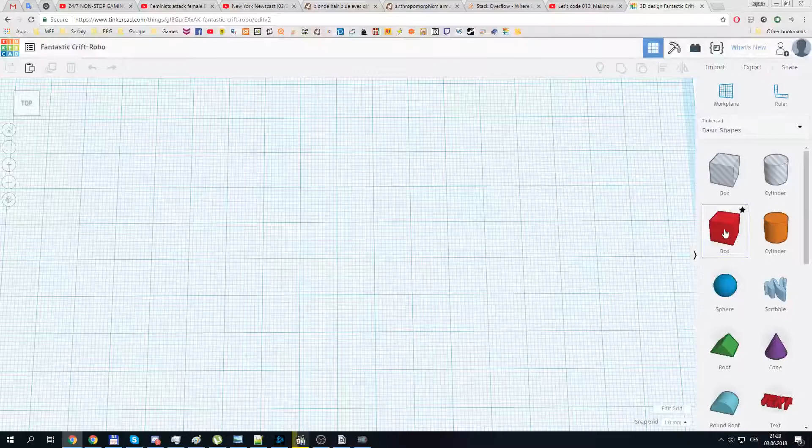Okay, what I want to do now is to create an object that will easily let me test what rotations can I expect to work with. You will see in a while. I probably should have created this ahead of time, but I was lazy.

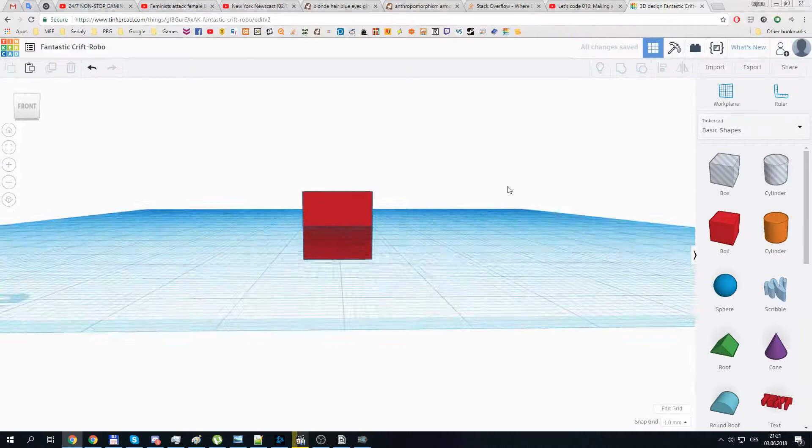So you have to sit through this, unfortunately for you. But the benefit is you will get to see how to learn something. If you do not know something, you need to search and figure out how to do it yourself, right? So this is what I will show you how to do.

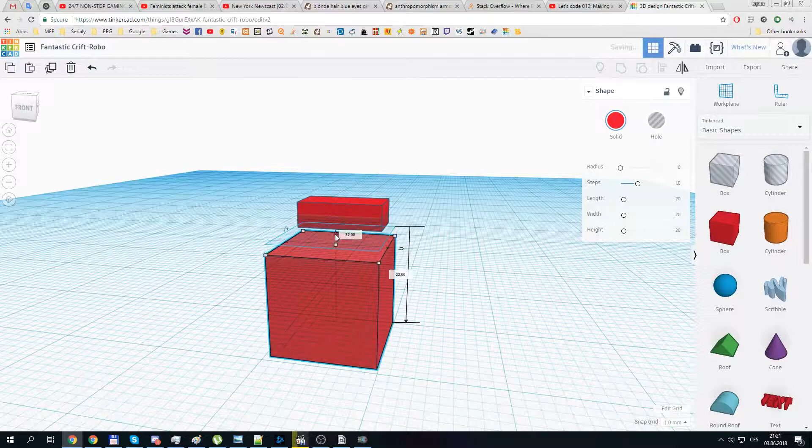So what I'm trying to create is a dog, believe it or not. It will be really simple dog. It will just have a head, body, and 4 legs. So the legs can be like 2 by 2 or even 1 by 2 like this.

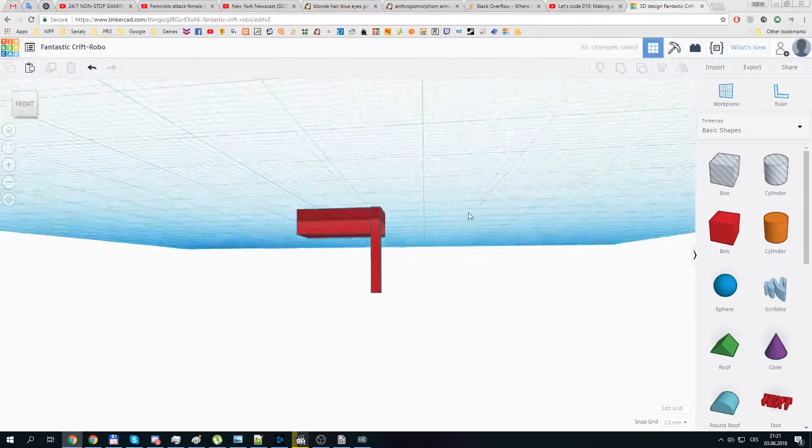Okay, let's move the leg over here. Let's move it up with the rest of the body. And how long will it be? Well, not this long, that's for sure. Hang on, why cannot I? Oh yeah, I need to do it like this. Let's make it 10 long in total. Yes, this will be a very, how do you call it?

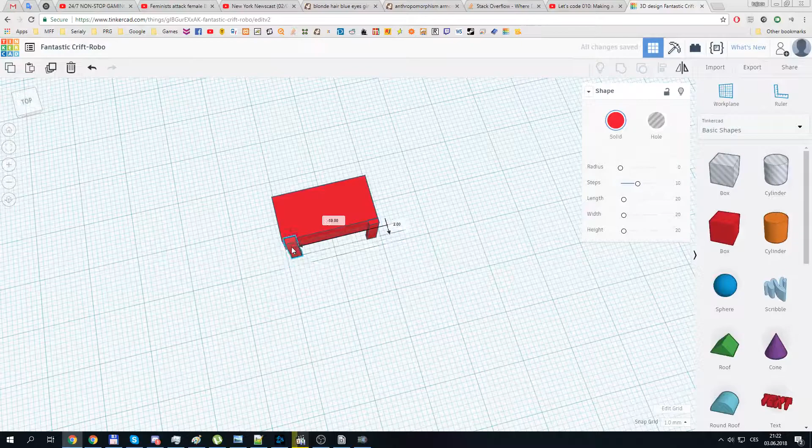Challenge dog, if you will. Oh no, I don't want to do that, I just want to move it. Oh, I hate it. Can I? Yes, when the two objects are too close to each other, it's whoa.

Yeah, I'm not very good with this program, as you can see. Okay, I want to move it to the left, and now I want to... oh, I need to move it down. Now.

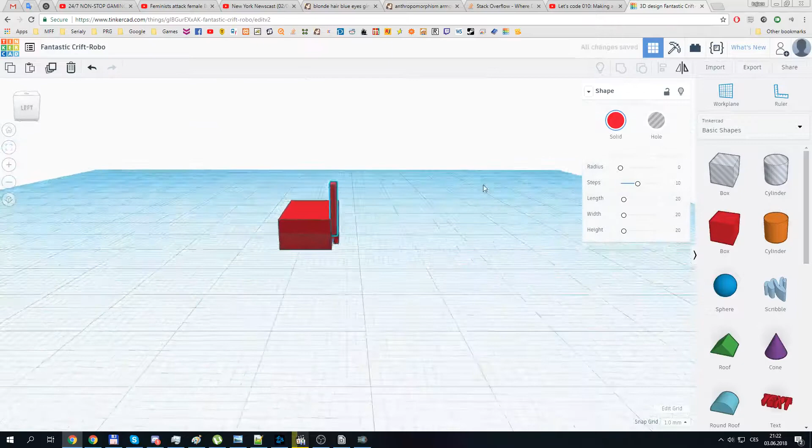I watched a Unity tutorial where you could... well, no, I don't want to move it alongside this axis. Okay, I think I will just move it like this. Yeah, this is better. Okay, so 2 of the 4 legs are down.

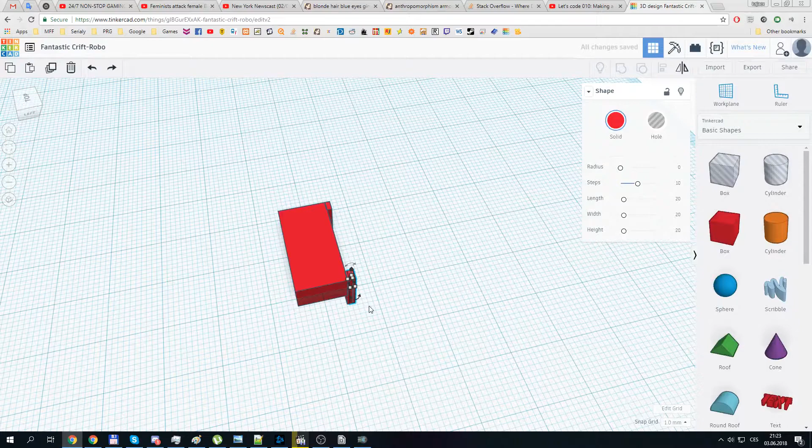But why is it so close to the first one? Now I cannot grab it. Okay, Control X, Control V seems to fix it. So as I was saying...

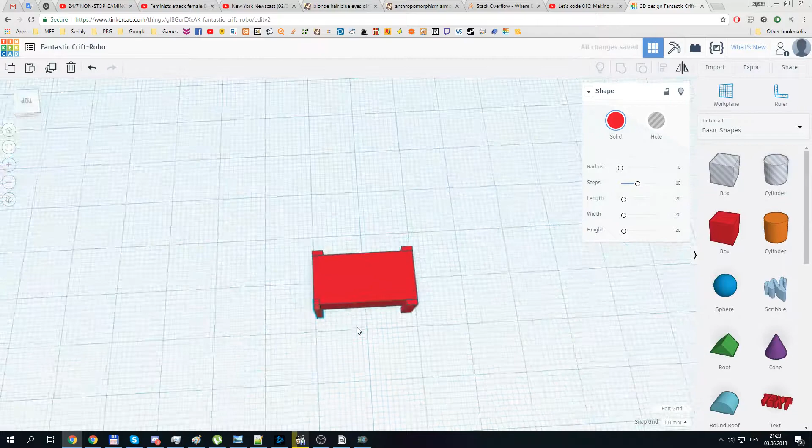But I want to move it to the left. Oh, I forgot what I want. Why is this rotated? Come on. You can just put 90 degrees. Yes, fine.

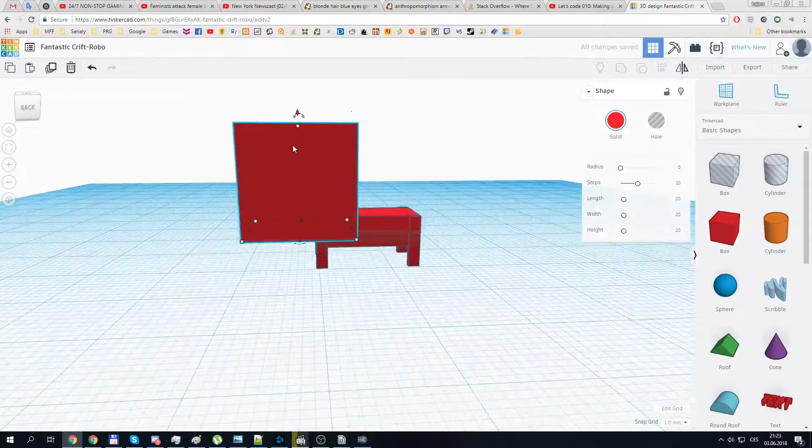Cool, perfect. Now it just needs a head, and we will be done. Our great dog will be complete.

I want to make it smaller. Can I just edit the numbers here somehow? Yes, I can. So let's just put it 5 by 5 by 5.

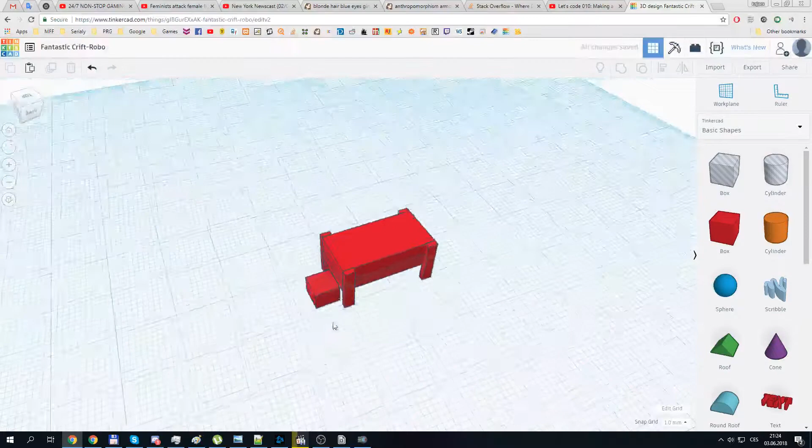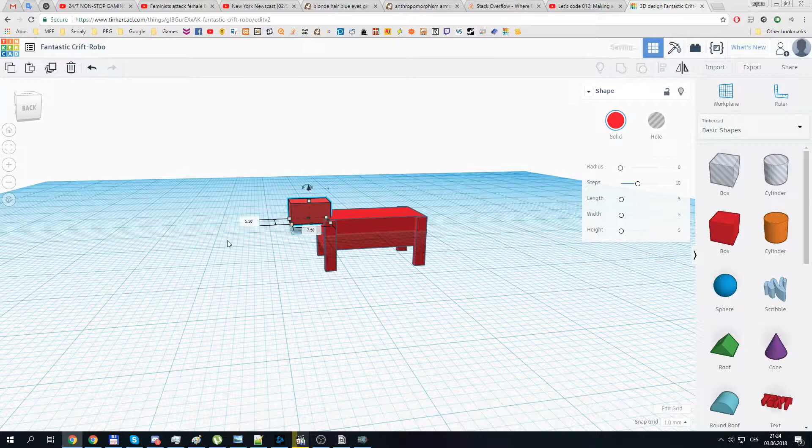Cool. Bring it up a little bit. Actually make it a little bit wider. Nice, so that it's aligned. Okay, we can have the head clipping through the body a little bit. So this looks like a very poor dog. I certainly don't, how do you call it, envy it in any way.

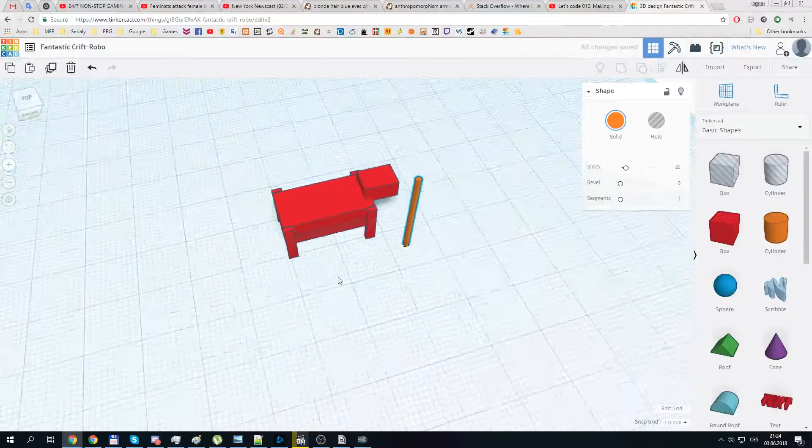But it will do. Now what will be very important for me is to add three cylinders that will be there for the 3 diagonal axes. So the question is, what color do I want the dog to be? And the dog can be yellow, maybe.

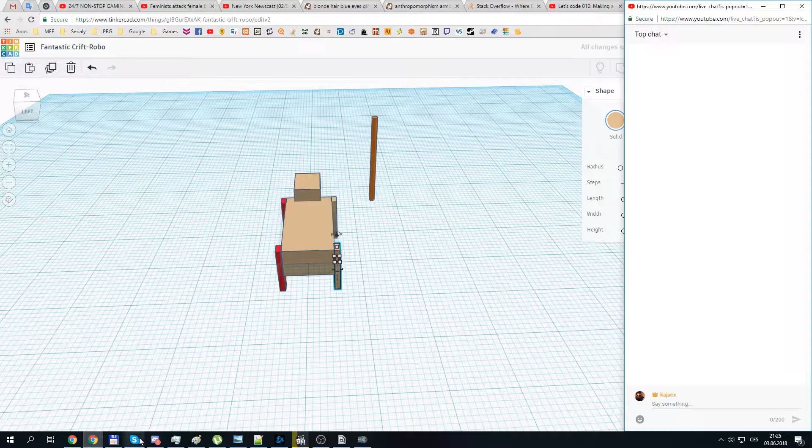Now we will choose this weird color for the dog, because I actually want the red, green and blue colors for the axes. So you will see in a moment what this will be about.

And I promise I will get back to particle fleet shortly. But for now, let's try to have the dog looking to the... we will try to make it so that this is the x-axis, this is the y-axis, and upwards will be the negative z-axis, because that's the way it is in particle fleet.

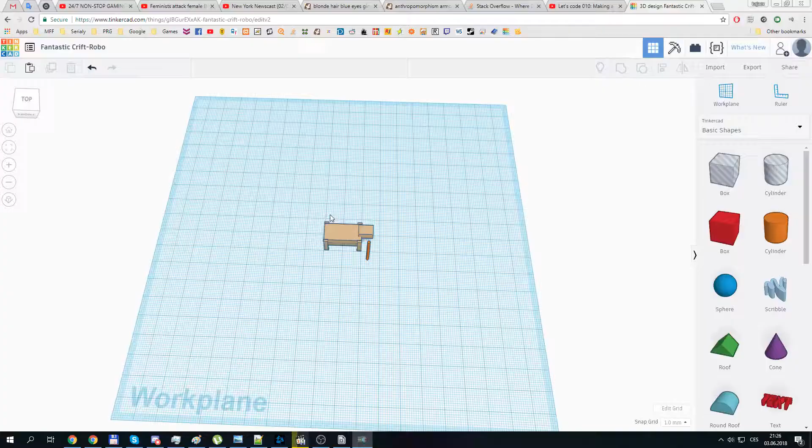Closer to the camera, which is this way, is actually z, negative z. So this way is positive x, this way is positive y, and upwards is negative z. So that's what I will try to do with this dog. And if it doesn't work, I will just rotate the entire model.

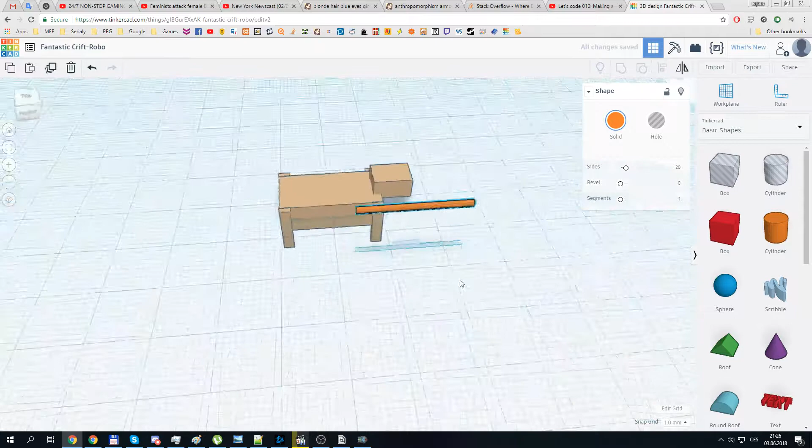So first I need to rotate this cylinder. How do I do this? Like this. Can I make it stick at 90 degrees? Oh yeah, I can rotate it with shift. Perfect. Now I need to move it precisely into the center.

Now this will not be easy. Actually, I think it... no, I don't. Oh. What is this?

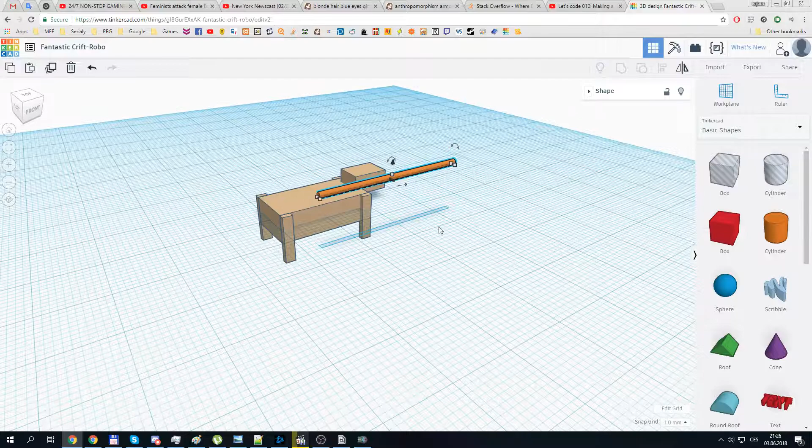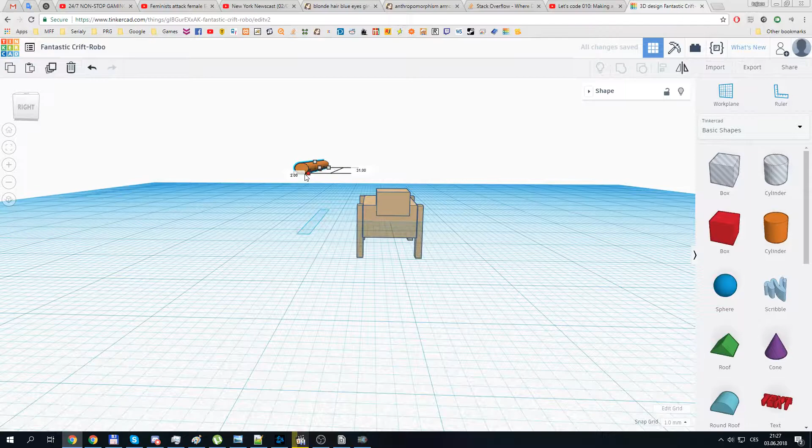Yeah, I want it to be 2x2 if possible. 2, yes. No, not by 2. Why cannot I make it just 2x2? Come on. 1.5. What is wrong with this? 2 by... can I just edit this? Yes, 2x2. Perfect. Oh, it's a little bit wide, but no problem.

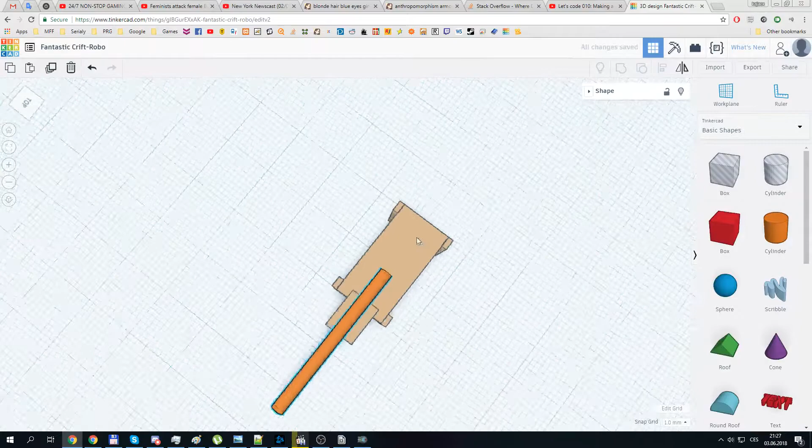Now I just want to make sure it is in the center, like this, and it starts at the center as well. Okay, so that looks cool, and now I want to make sure it's in the center, like this. Perfect. So now this will be the x-axis.

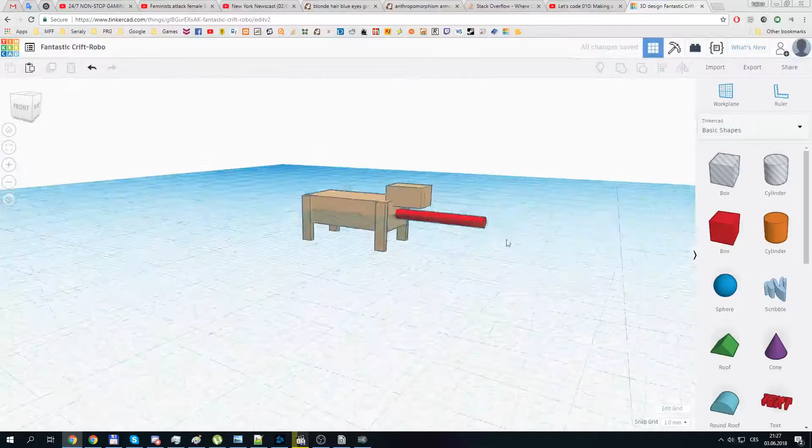So let's change the color to red. How do you call it? Yes, red. And let's add the letter X to it so that we know it's the x-axis. So where is the text? Okay, text will be just X, and it's already red. Font, can we just get yes, some simple font like this?

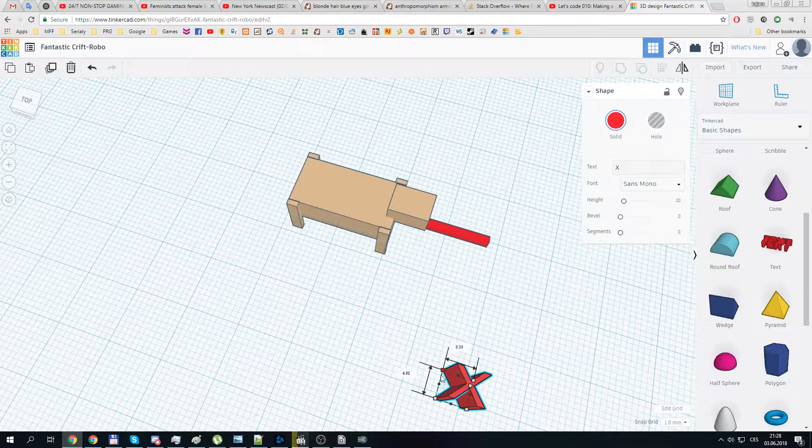Perfect. So it needs to be a lot smaller. Let's say like this, and also a lot smaller like this. And now we can see easily that this is the x-axis. Let's put it on top here. Cool. Now I need to do the same for the other two axes, and this will serve

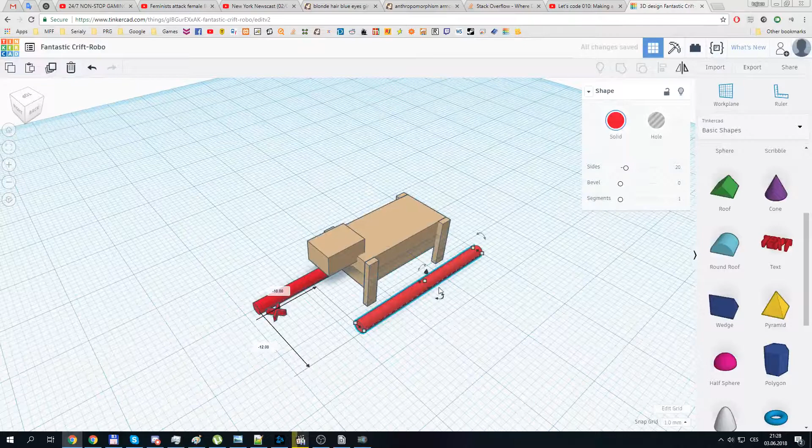as our test model, that we will test all the rotations that we want to test on this model. Also, let's make it 30 long, so it's a nice round number. Okay, so this one went pretty easily since I could just copy it.

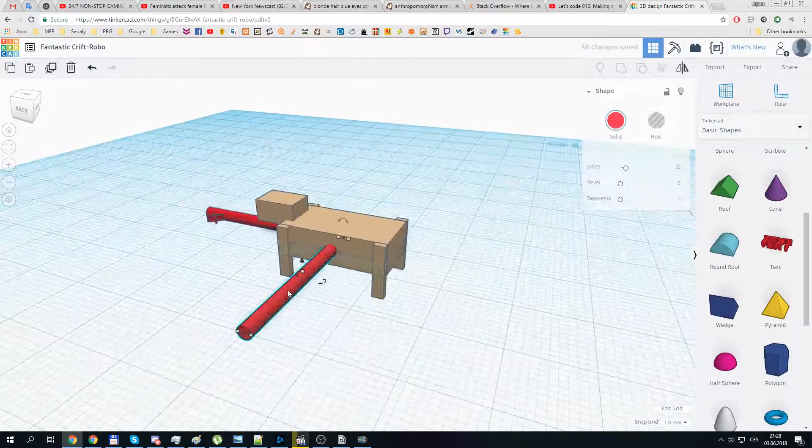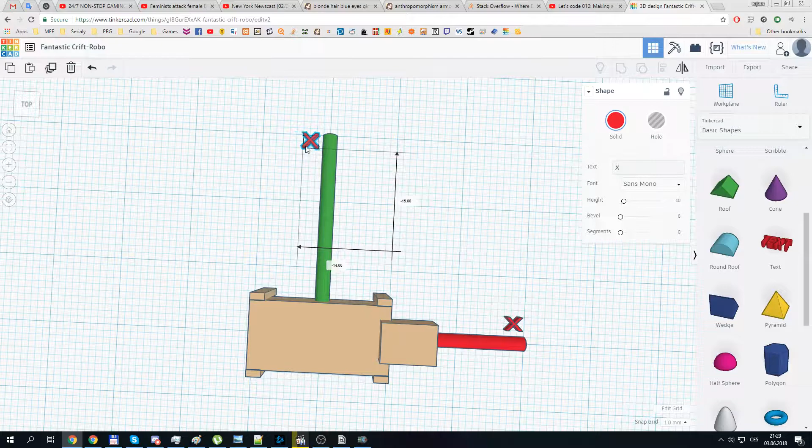So let's go green for this one, and let's use Y for this one as well. Okay, let's just do this. Let's just see if I can move it. Oh, how do I? Oh, I hold the middle mouse button to move the camera. Okay. So let me... how do I rotate it? Oh, I see here.

Nice, and I change the text to Y and the color to green as well. Now for the Z-axis, that will be pointing downwards actually.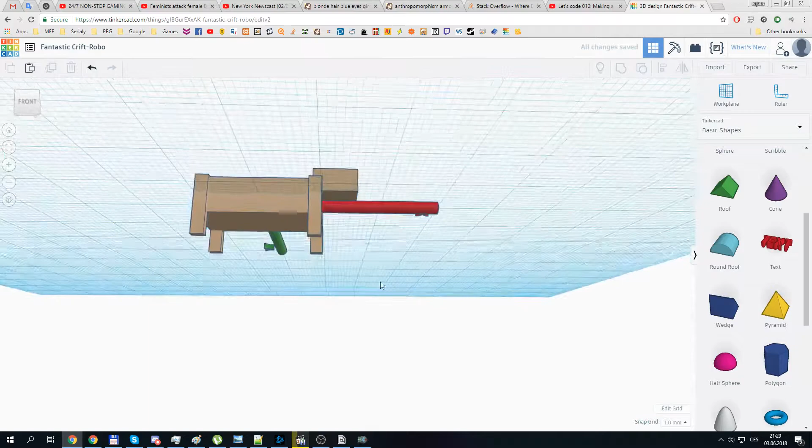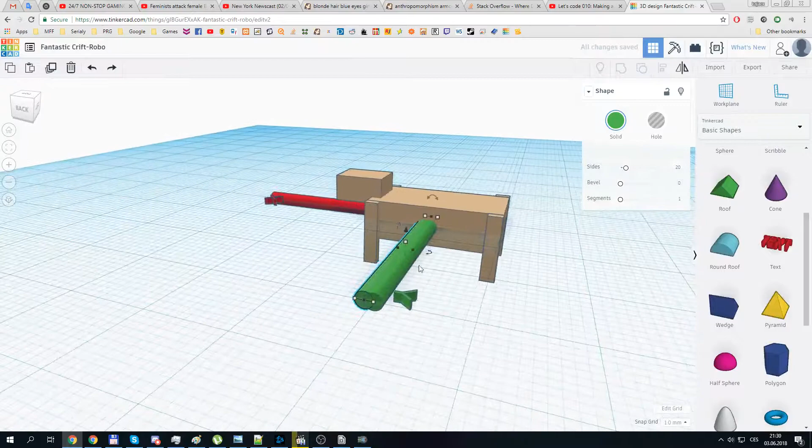So how do you rotate this? Like this? Cool. Now I need to wait. Did I rotate the correct one? No, this is the wrong one. This is the one I want to rotate. Yes.

So like, no, I was double fooled. This is the one I want to rotate. Yes. See, because this line is the middle line, and it goes into that.

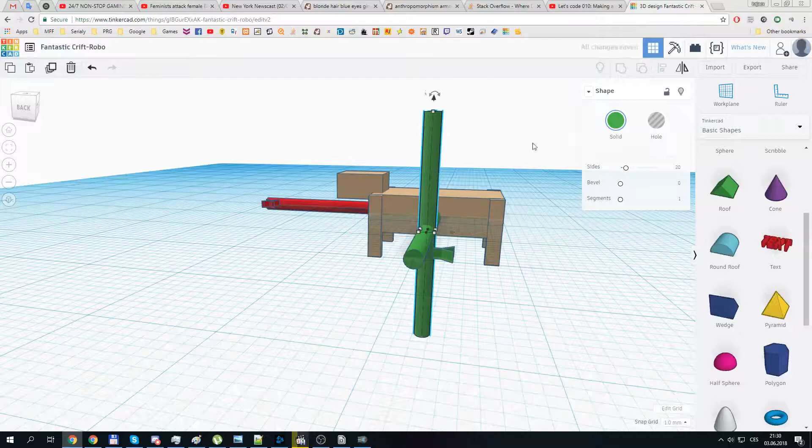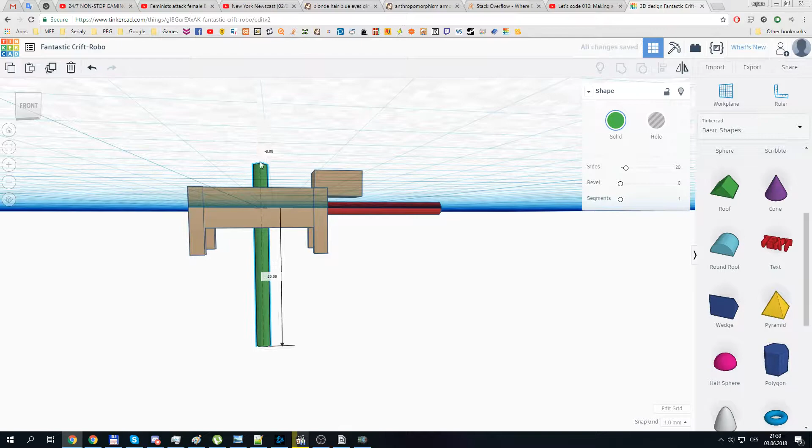Oh no, what is going on? Stop. Okay, Control Z. I just want to move it alongside this. Yes. Oh, is it in the center? Looks like it, yes. So now I just move it down. Like so. Perfect.

So let's choose blue for this one. Which blue? This one? Okay, fine.

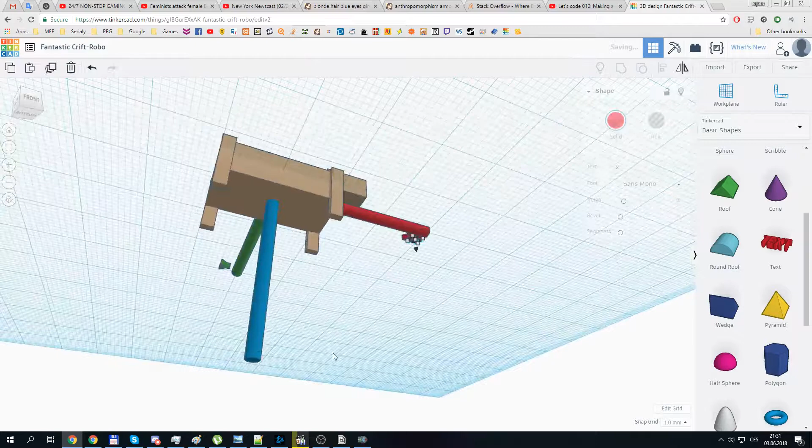Now what is this? Okay, just paste here. Okay, how do I bring it all the way down here? Maybe like this? Oh no. Yes. Just a little bit down. You can do it now. Rotate it.

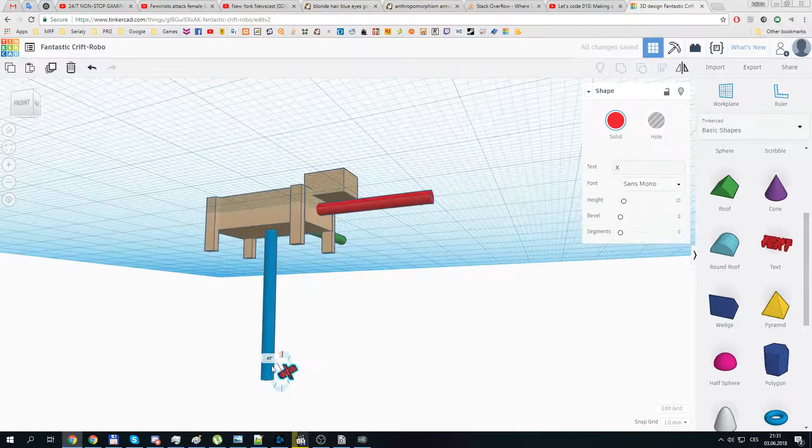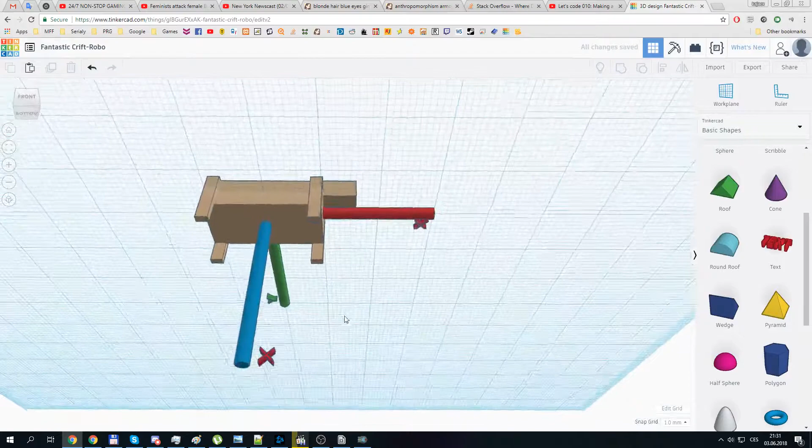Okay, it's starting to look good. Now let's move it closer to it. Nice, maybe closer like this. Almost perfect, and let's rotate it like this so that it's next to the axis. And finally let's change the text to Z and make it blue as well. Nice. So it looks like an N, but it's fine because we will know it is Z from the color.

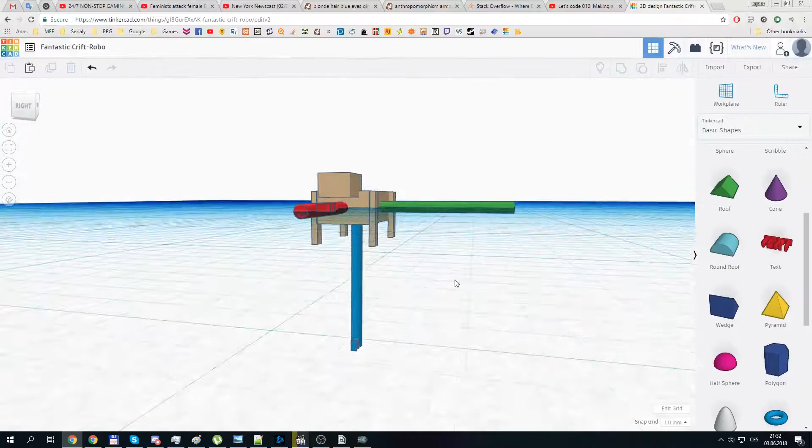So now we have this model, and when I import it to particle fleet, hopefully also let's move this Y here, or not. Yeah, whatever. When I import it to particle fleet, hopefully it will match up with the coordinate system in particle fleet. That is the hope.

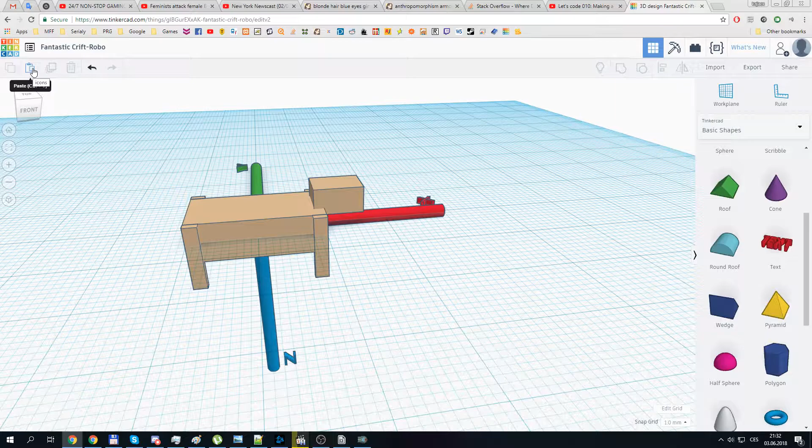So how do I save it so I don't lose it? Oh, I see, there is a box over here. So this says I'm looking at from the front. Now does front mean it's from the X position? I don't know, to be honest, but whatever.

Let's import it and see what happens. So there is an import function somewhere here. No. Yes, export. So yes, I want it as an OBJ, and now I need to save it.

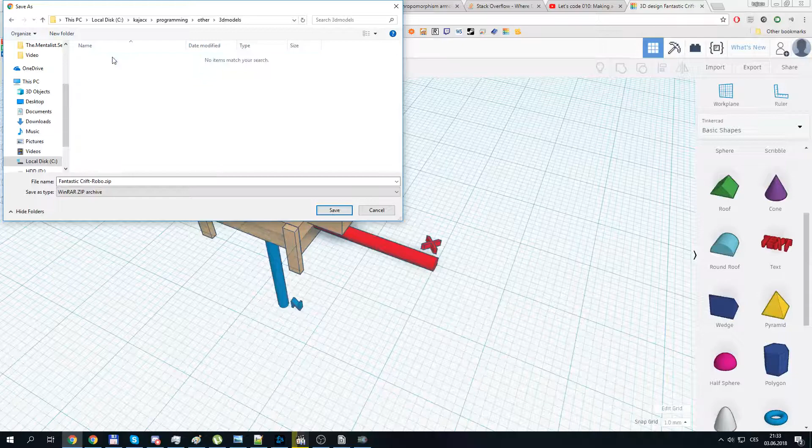So let's see, other, let's create a new folder called 3D models, and we can save it like this, it's fine. So we have it here, extract here I guess, and this is the thing that we want to change, right? So we will rename it to debug dog.

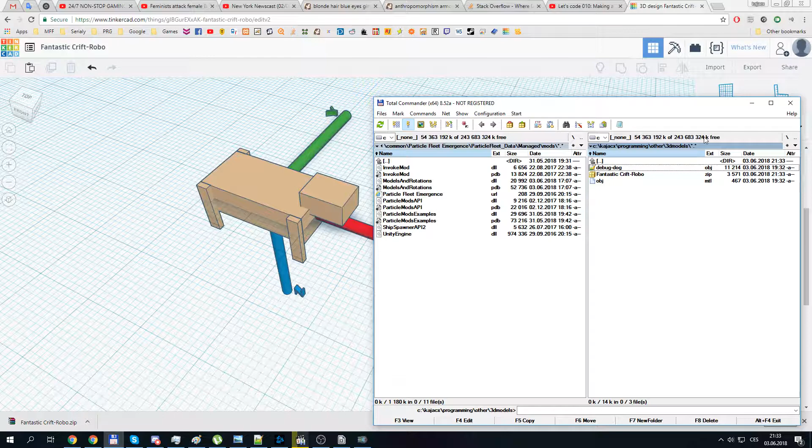And now the moment we have all been waiting for, let's import it into the game. So where is it? Yes, we can see the code for the trees. So let's import the dog. Now it will be really simple.

Maybe I should write a new script for it so that this doesn't get too crowded. So I will do that. Script: debug dog create. Okay, I will write a function called import model.

And the way you import the model is, for now you need to specify the absolute path to the file, which isn't the best I guess, but it will do for now. And then you will need to name the model somehow. So I will name it dog1, and then you call the function load model. Now this is a function that I wrote myself, so it will not work for you, but hey.

This is just for me to test it out. If it works out great, I will export the modded version somehow, so you can try it as well. But for now, let's see if it works.

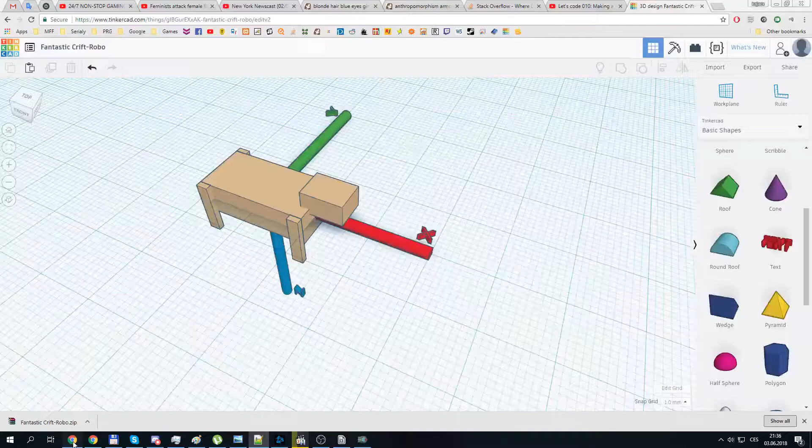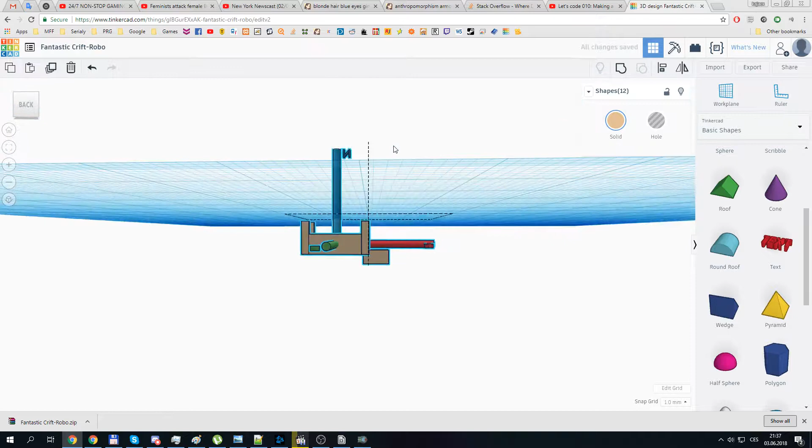So this will be really simple. I just press Ctrl A for everything and rotate it by 180 degrees. And now I just... whoa, no. I just need to move it back to center. Like this, yeah.

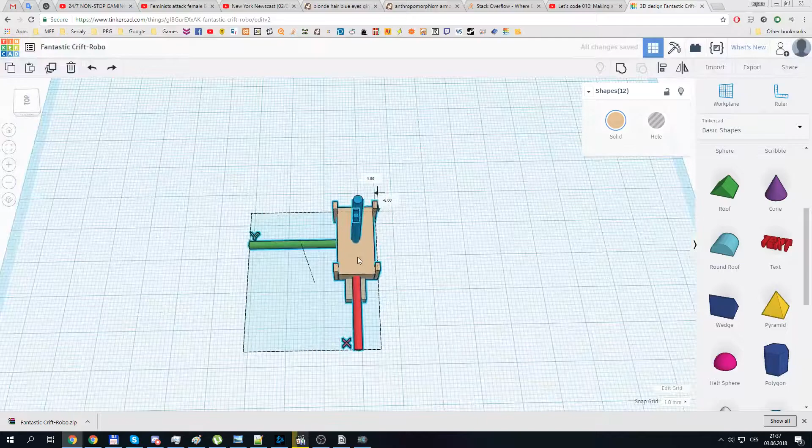And this needs to be centered as well. So how do I move it? No, stop it! Okay, like this then. So now it should be fine.

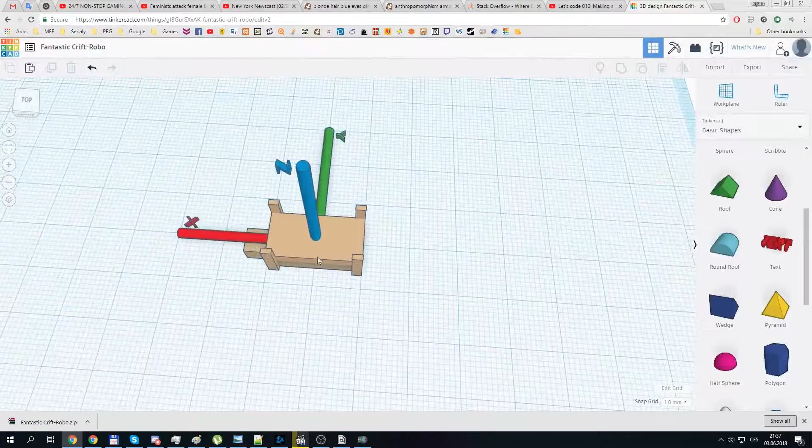So now if I import the model, I just need to make sure that these axes meet at the center, because otherwise everything would go horribly wrong. But these three axes are there for debug. If you made your own model, you would just have this model and wouldn't put these axes there. I'm just putting them there so you can more easily see what is going on.

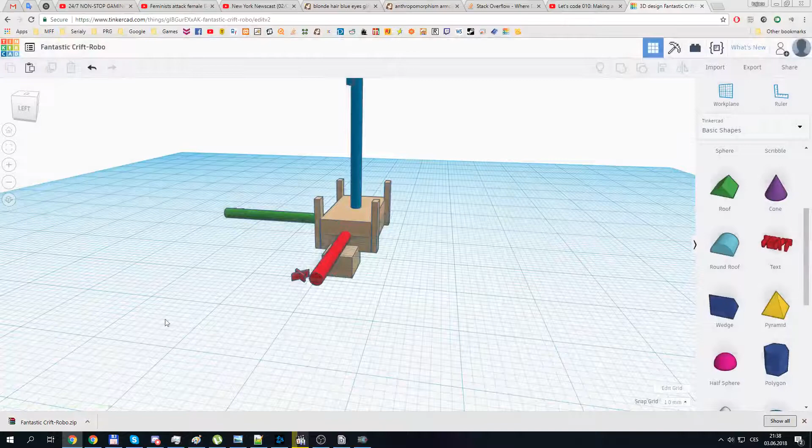So now I will click export again into object. I can save it here, that's fine. And I click extract, okay, override. And I override the object as well.

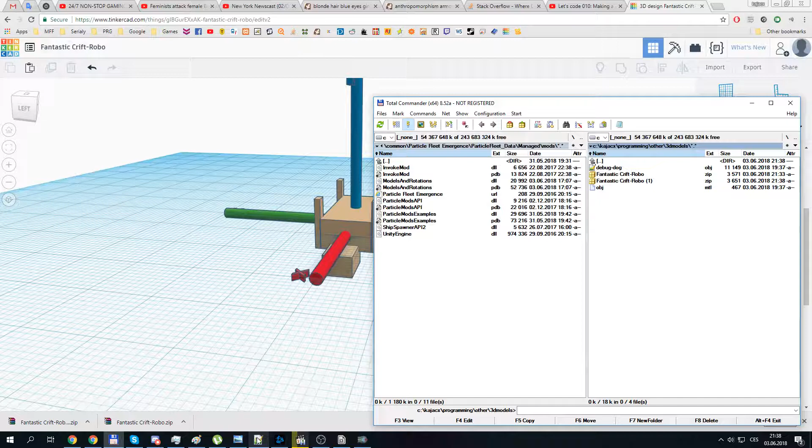Override, yes. So now if I recompile, I think it will actually not reload, because the model is cached, so if you call this function again... hang on, where is it? If you call this function again, it will not reload the model. So I actually need to exit the game and open the map again, which is again like a problem that needs fixing, but hey.

Okay, unpause and oh, something went wrong. But why? Model test 43. Maybe I need to hit compile anyway.

Okay, let me. As you can see, there are many problems with the current code that I would have to fix before I release it. So that's why I don't want to release it, because I'm too lazy to fix all these problems.

So let me compile before unpause. What is going on?

Debug. Well, let me remove this and see if it helps. No, it doesn't.

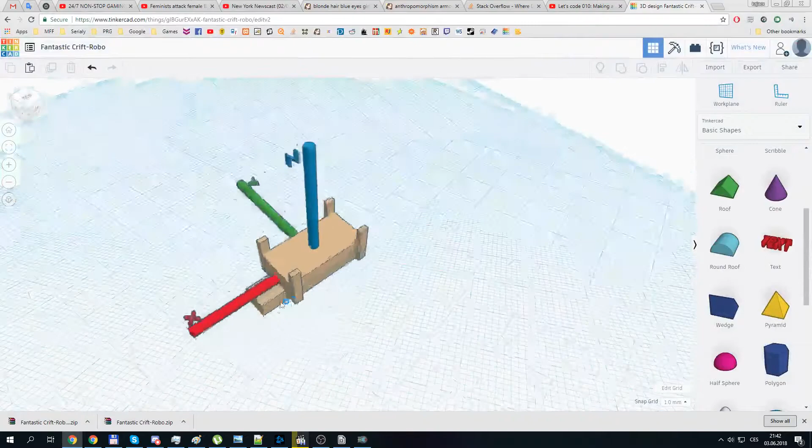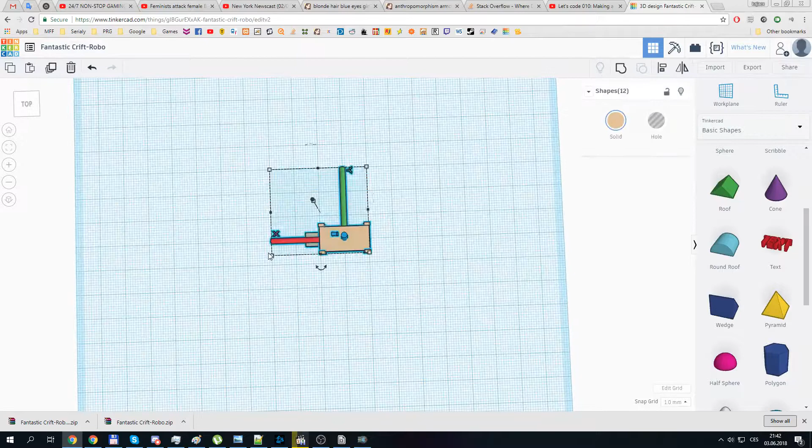So if I zoom out, yes, it is my fault for not zooming out earlier. So where is the center exactly? Right underneath its neck. So it seems that this line is for the center. I really wish the center lines would be highlighted more, so you'd see this is x plus, this is x minus, so I wouldn't have to guess like this. But this program is free and works pretty well, so I cannot complain that much.

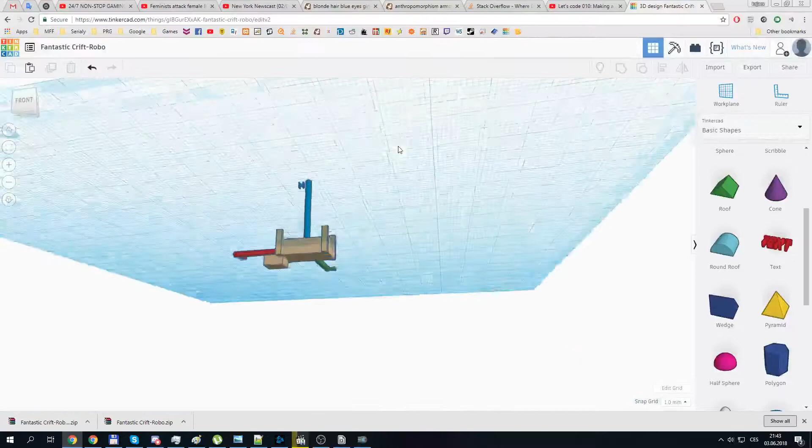So is this fine? Is this the line in the middle? It looks like it. And is this the middle line? Yeah, okay. And this way it's centered as well, yes. So now it should be fine.

So can I save this somehow? Okay, let's just export object. Save. Extract here. Yes, okay, rename this. Yes. And now restart the level. It should be enough to restart just the level.

Okay, so now I have to be sure to compile. Interesting, it doesn't call the awake function now, it seems. Well, let's hope it doesn't break. No, what did I do? Or maybe it's just...

Yeah, I think I know what's happening. Maybe the code is so broken that you just cannot leave and re-enter the game, that you have to restart the game every time you change the models. Well, this is pretty annoying, but I will fix it another time.

For now, I want to test out. I want to make the cannon that I said earlier. But in order to do that, I really need to test out how to combine rotations, because it is very important.

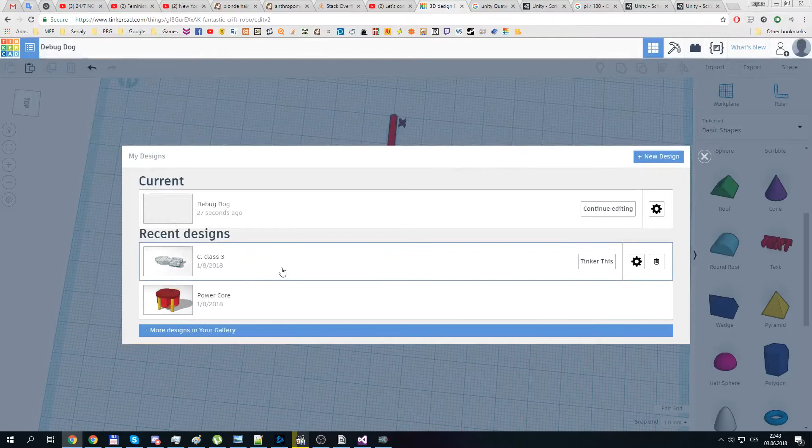This object file in the description. Let's make this public as well. By the way, this one is for the ship, and this one is already public. This one is for these little cores on the ship. So I guess I can just do a new design here.

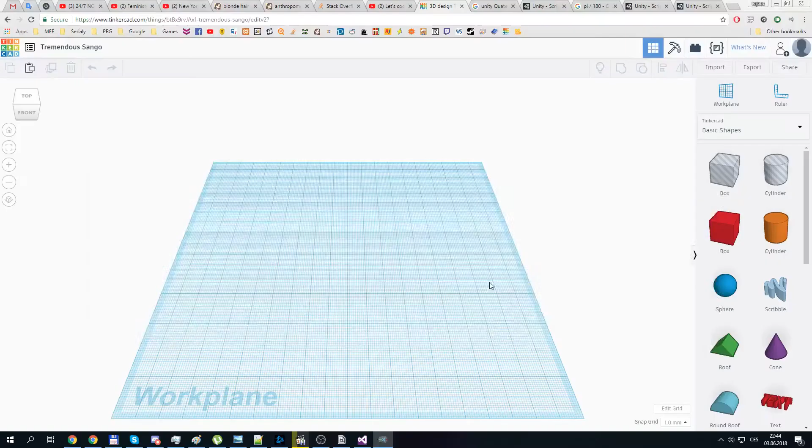And this one will be for the... Yeah, so the turret will have 3 parts, as I said. One that will just be welded on the ship, a second that will turn left and right, and a third that will turn up and down. So let's get to it. Where is this center again?

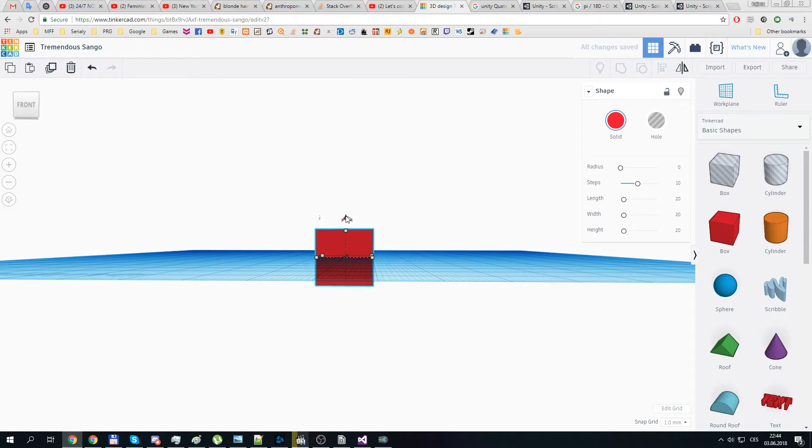Okay, so this one, the first part, will be symmetrical, so it doesn't matter. Doesn't matter which way is front and which way is back for now, so I can do whatever with it. Also I want the entire model to sit above the 0 axis here, so that should be fine.

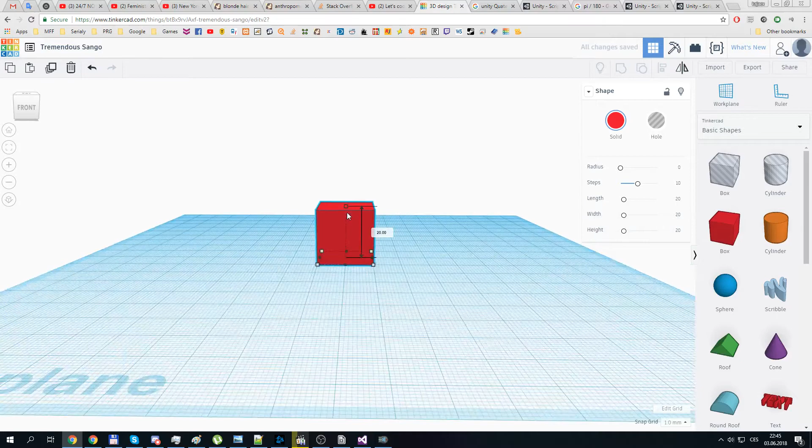I just want to... no, oh yeah, I know, I want to click this. I want this to be like - this should be too tall. Does this size matter? Probably not, I can rescale it. I just need to keep in mind that I want to keep everything to this side. I want a cylinder on top.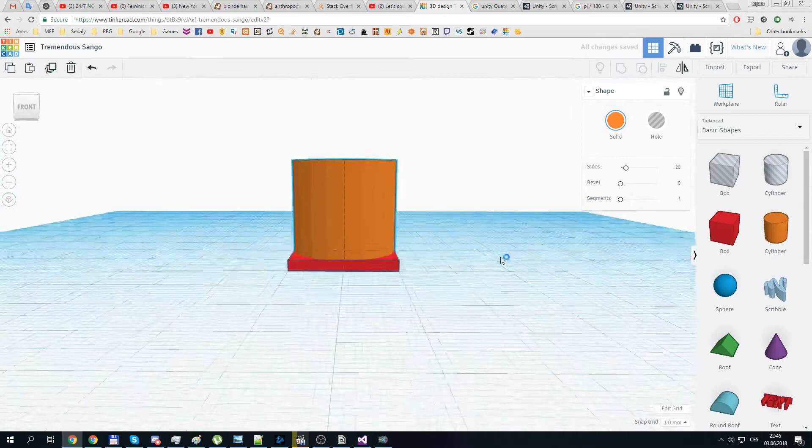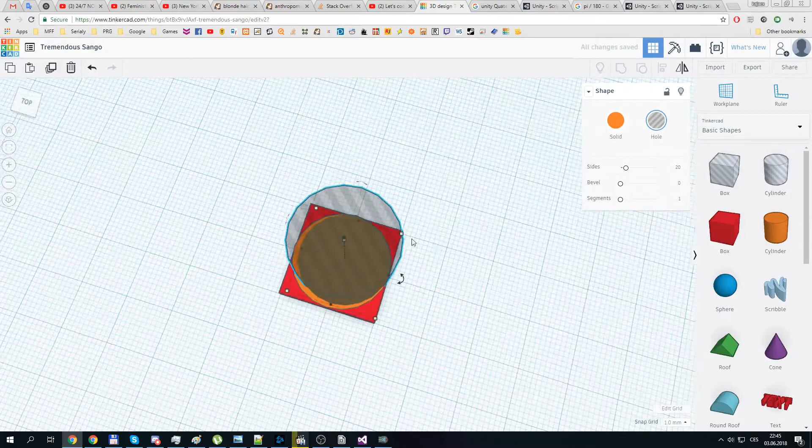Okay, let's make sure that it's like this. Again, this should be too tall, or even just one. And then I want a negative cylinder on top of that. Now this will cut a hole into the cylinder, and it will look fine. Nope, no, just one tone. Oh, it looks so weird, but I have to test it.

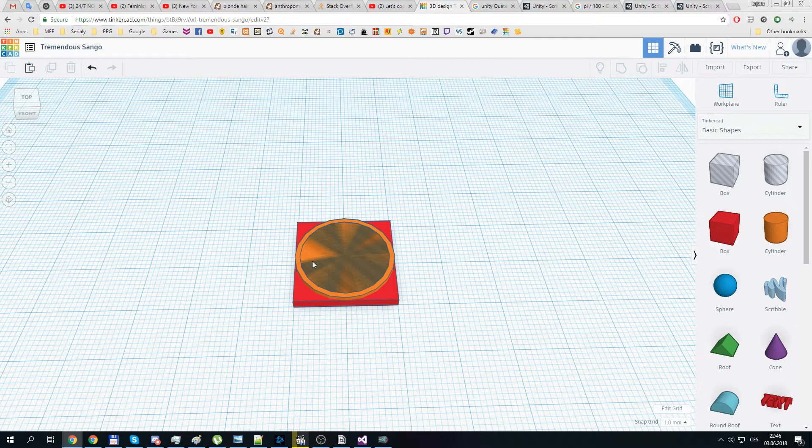So this will be the base for the unit. Next I will put the thing inside of this that will turn around, and lastly I will put the turret inside of that. So how do I save and export this?

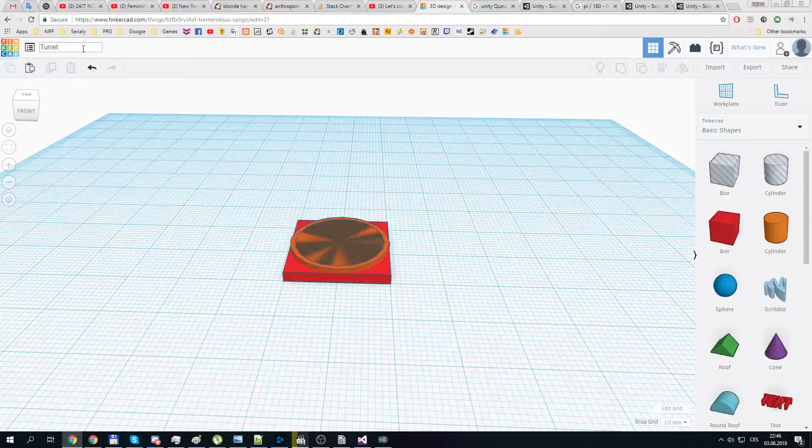Okay, do I want this to be red? Maybe I want it to be like something. This should look fine. Okay, so this will be called turret base. So export object, turret base, extract here. Yes.

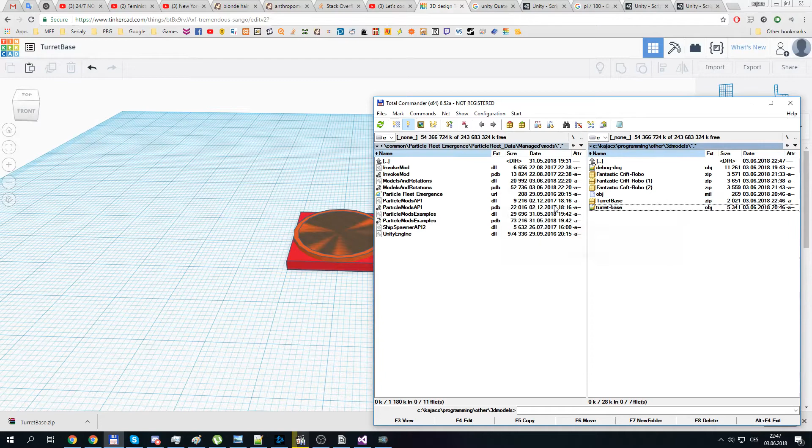So turret base. Also let me add it here, because here I am already working with the ships and with the cores of the ship. Also let me rename this. Although let's actually do it like this. That will be fine as well.

So instead of this I want to call this, then this will go here, and finally I want to load models as well. So what is the path here? Like this. Then turret base.

Now this name here doesn't matter very much, but it needs to be unique between all the models loaded. I think all the models inside all the cores need to have a unique name here. I will definitely be changing this so that the name needs to be unique for the core, or for the script in the core - no, maybe just for the core. Well, we will see.